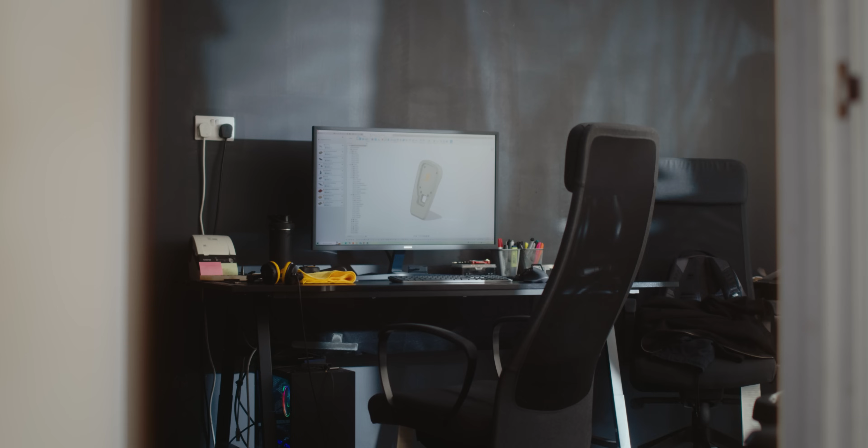Up until now, I've created the mould for most of the components that make up the charging stand, but the main body remains the last major piece to tackle. Originally, it consisted of 4 separate components.

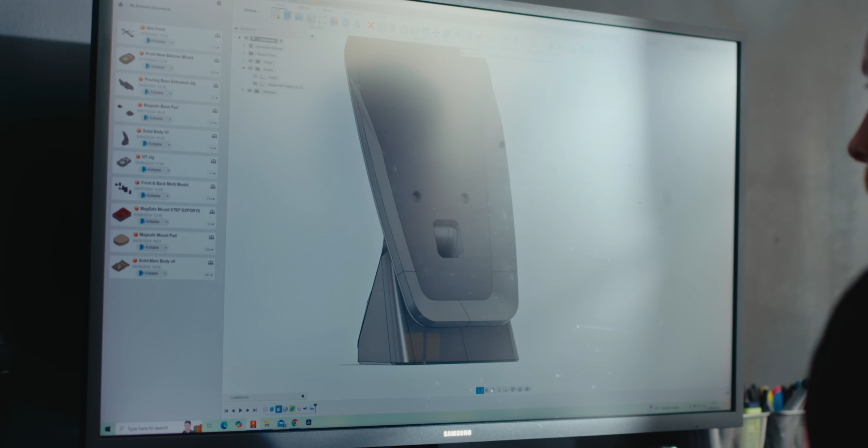While assembling it was enjoyable, it wasn't practical for a low volume, one-person production workflow. In line with the theme of efficiency from the previous video, I've redesigned the main body to be one single piece. By consolidating the parts into one component, I've lost the detachable back panel and insert, which covered the path for the cable. To accommodate this change, I've designed a larger cavity through the body so the entire cable is able to pass through.

I've designed a matrix mould for the main body so I can resin cast it, and a separate tube that will be 3D printed and inserted into the mould before pouring in the resin. This is what will create the pass-through for the cable, and it'll also prevent the component from getting stuck inside the mould. There's many ways you could tackle this, but I'll explain a little bit more about why the tube can't be part of the master and a bit more about the mould design itself.

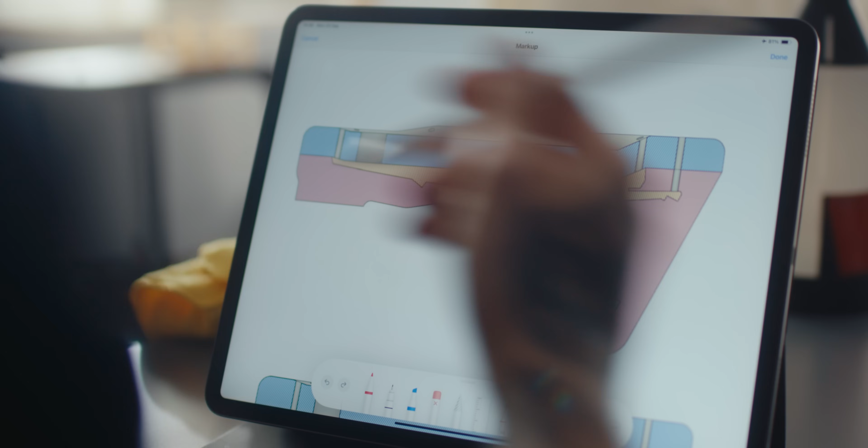So if we take a look at the cross-section of the mould, let's say this is at the point where I've poured the silicone on both halves and the master's got the tube built into it. So we'll have silicone running through the tube, and we'll have to have a split line somewhere. Let's just say it's in the middle. So we can already see why this won't work.

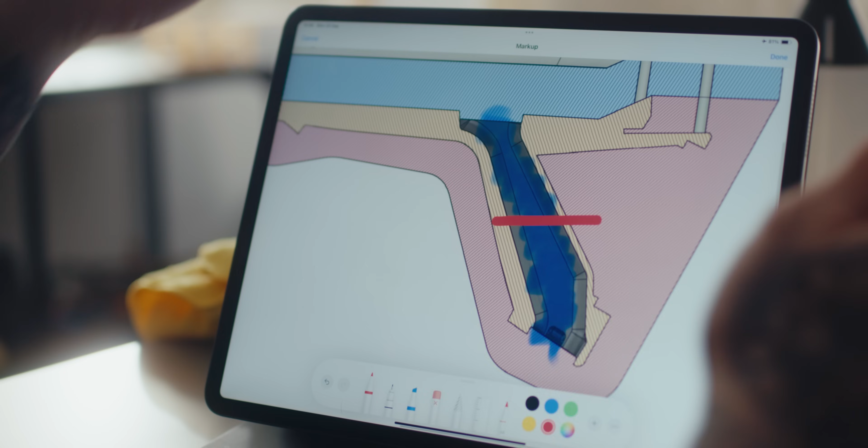We've got a narrow section there and a wide section there. So anything past here won't be able to go out of that smaller opening. And same here, because this is wider, it won't get past that narrow section going that way. So we can't have it in the middle.

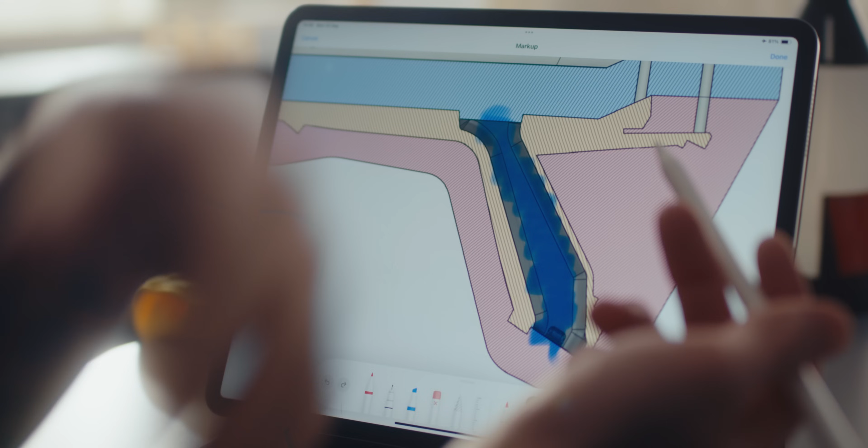The obvious place to go is the narrowest point. So if we go there, that would allow the top section to come out, but we'd have the same issue along the bottom, and vice versa. If we put the split line there with silicone above it, all of this will not pass through that section there. So let's just say this wasn't an issue.

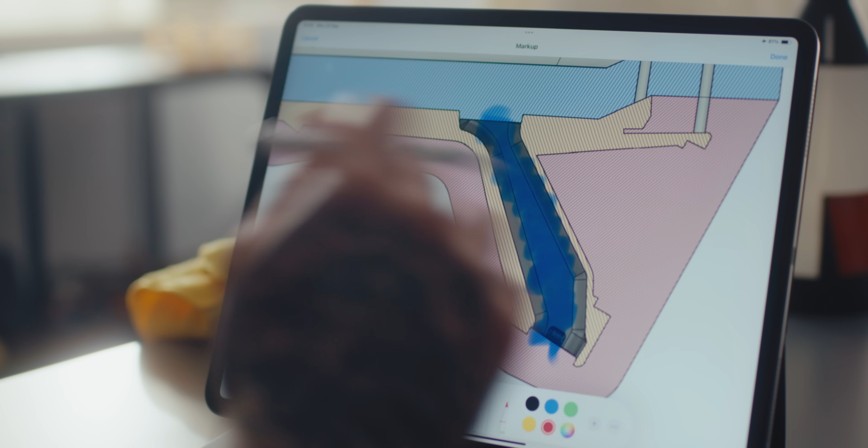Obviously, I can't change the shape of the tube at this point because it was an afterthought, and I'm restricted by the pre-existing geometry of the part. So the shape is the shape. But let's, for argument's sake, say it would work and we had the split line in the middle.

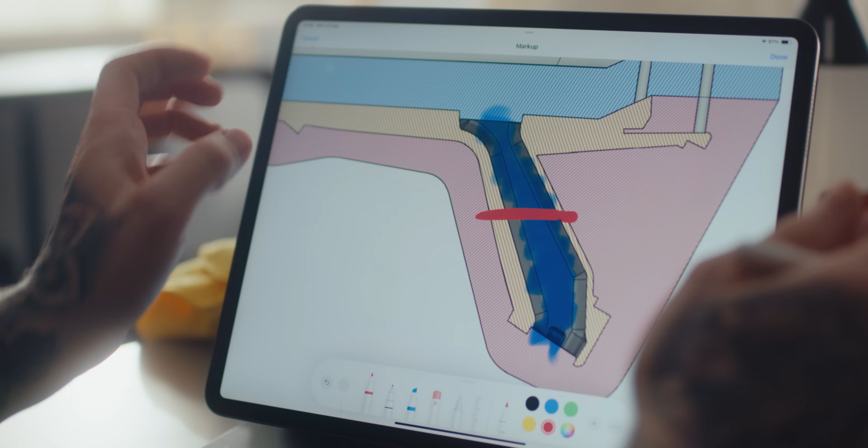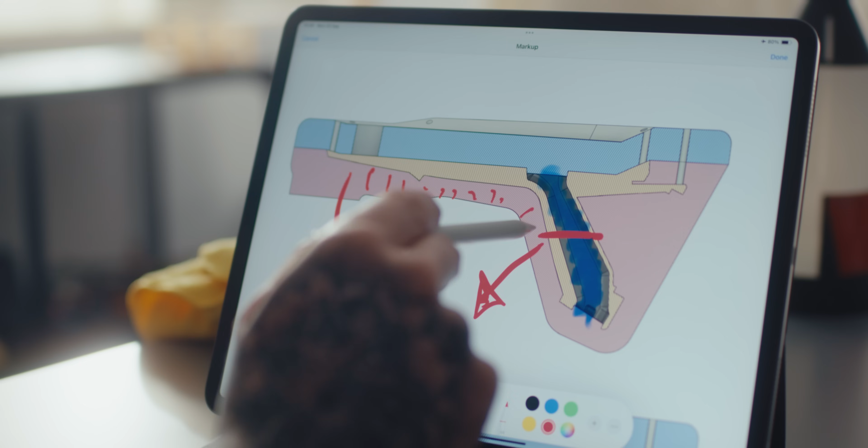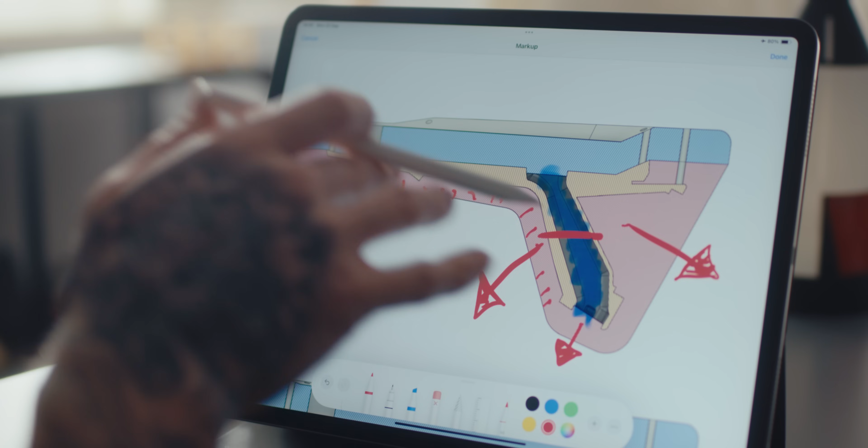When it comes to removing the silicone from the bottom, I'd start with peeling this surface away. Then I peel this one away, and then I pull the silicone out of the tube, which has to go this way. All of this silicone can't go this way until the silicone out of the base is removed, because it's just trapped in there. So to remove the silicone from the base, that needs to go that way. But that now can't go that way until this is removed. So you've got this conflict of direction, which will trap each one in.

And remember, this is a cross section, but this silicone isn't just there, this wraps round the tube. So we are just looking at this in one plane. So we could alleviate this by moving the split line there, which would work. But remember, we can't have silicone in the tube, because this is just hypothetical at this point, since I am restricted by the shape of it.

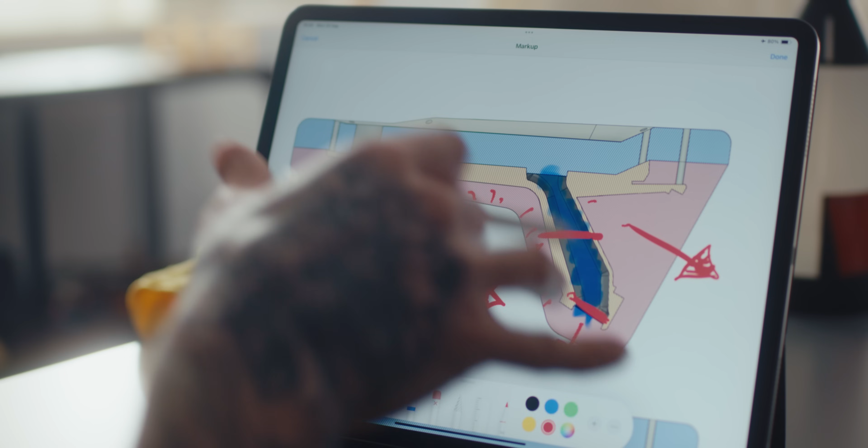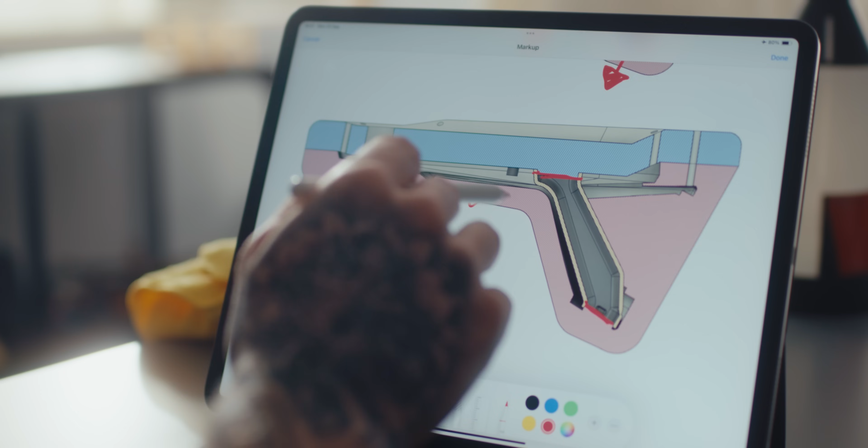So to get to this point where we're able to, this is why I've decided to put the tube in there. By doing that, you can have the split line of each mould just past the entrance of the tube, which will also act as locators for the tube when I put it into the mould. We can do the same as I've just explained, removing this portion first, peeling it off that way. That will be able to go down there. And actually what I'd do is probably release this portion first and then pull the silicone out that way, or the part out that way, depending which way you look at it.

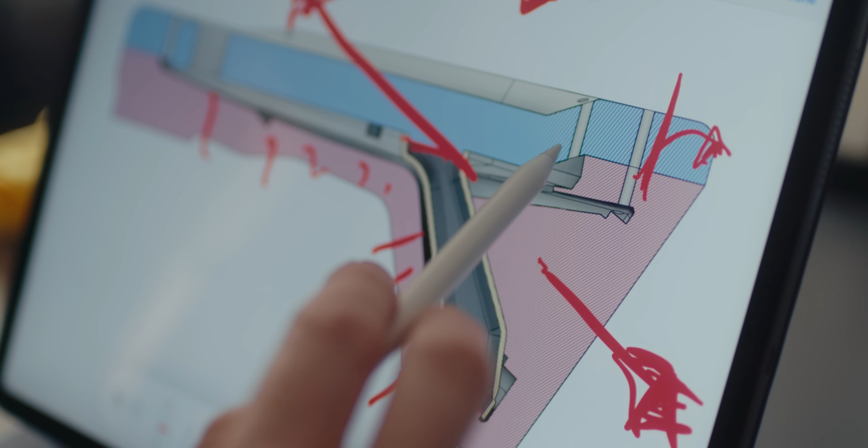You'll also notice that I've got an air hole running through both parts of the silicone. This has happened because I didn't want to put the split line running down across that face, just because I didn't want any flashing directly on the surface of the part. So that's why I've put it across there. Obviously this has created a massive undercut, but because it's a glove mould, I still have the ability to peel this off in that direction without it getting trapped inside.

Like I said, there's many different ways you could tackle this. There's probably things I've overlooked, as well as different methods. You could have had the silicone that's in the base as a third part of the mold. Maybe that would have made things easier, or it could have created more limitations. But either way, this is the most logical way I can see. It includes some overmoulding, which is something I've wanted to do.

So from here, I'm going to print some tubes. I'm going to print some covers to go on the tube. I'll be prototyping them to make sure I've got a perfect fit. And then from there, we can move on to doing the actual mold itself.

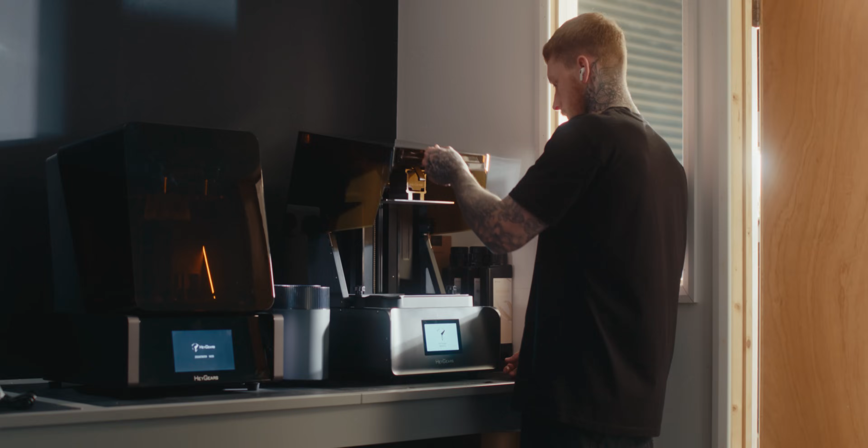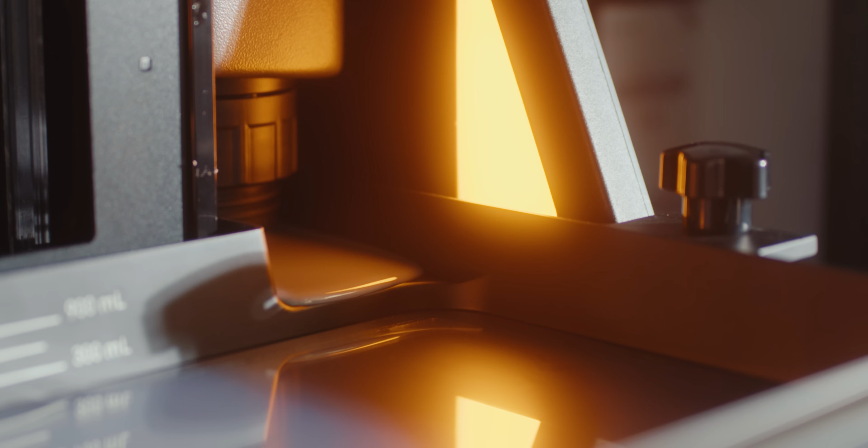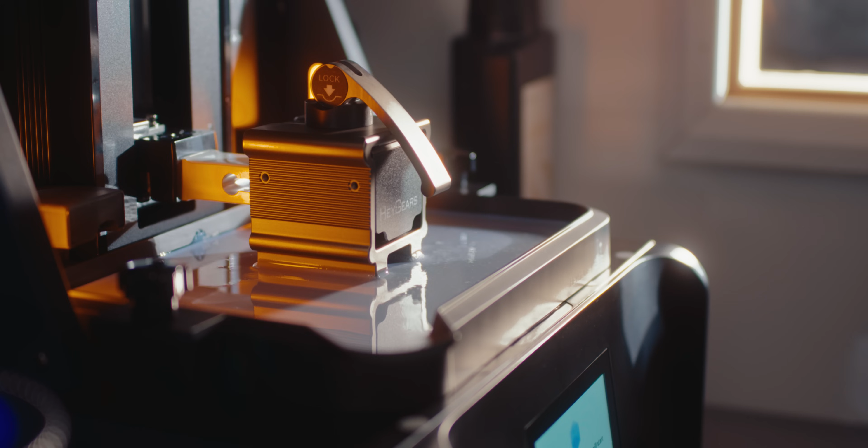I'll be printing these on the new Reflex RS. This maintains the same high quality and reliability of the original model with a few key differences. It's got a larger build volume, enabling me to print the mold shells that would have been too big to print on the previous version. It prints significantly faster as well, without sacrificing quality, allowing for more components per batch and quicker turnaround times. Since workflow efficiency has been a primary focus of this project, these added features will help streamline the process even further.

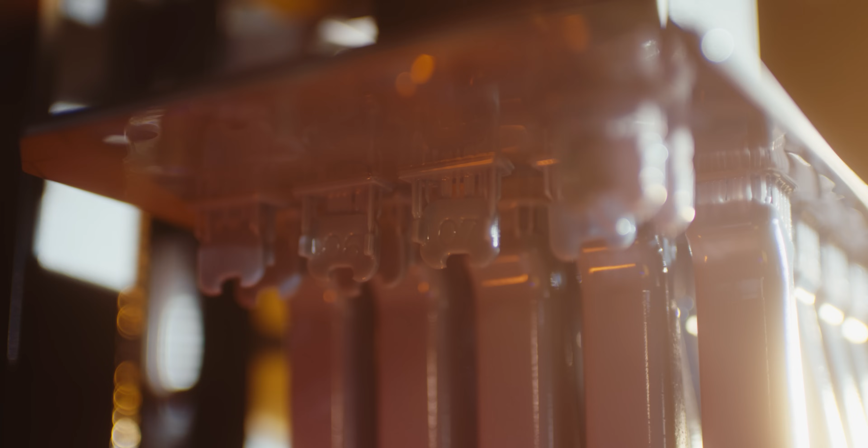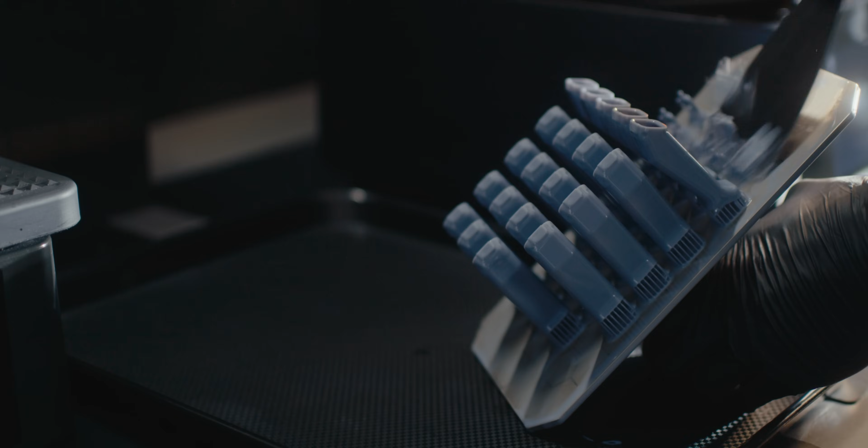I'm using the PARP 10 resin for these prints, as it's a high-speed prototyping resin that's also suitable for end-use components. Before releasing the parts from the build plate, I'm going to drain the excess resin by using the build platform tilting tool. This is a printable component specifically for the RS that can be found in the Blueprint software. From here, I can release the components, remove the support material and wash them off.

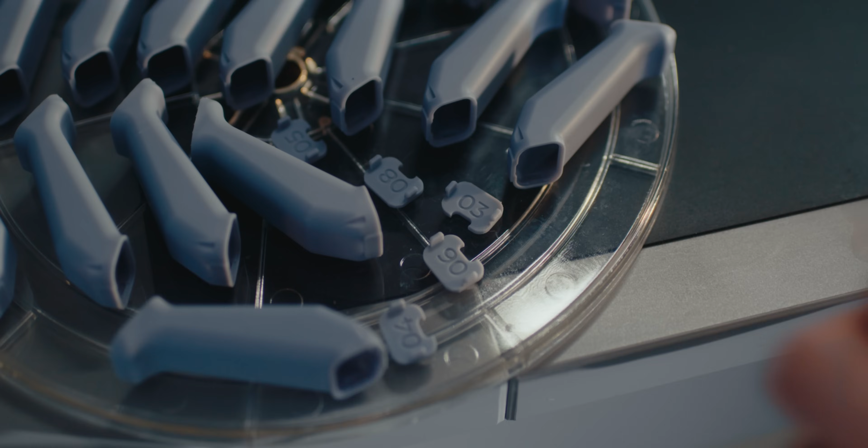Once washed and dried, I can set these off to cure. One feature I really appreciate is that I can send the sliced file to the curing station. This automatically loads the correct profile for the resin used, so there's no guesswork or need to remember settings for each resin. Another thing that I appreciate is that this resin cures in 5 minutes, so it makes for a really quick turnaround on prototypes and final parts.

Before I go ahead and prep these parts, I need to test fit the covers. The covers close up the large opening on the back of the stand, locating into the tube, keeping everything looking clean. Each cover has a slight variation in the clips, and out of all of them, number 7 seems to fit without any movement.

So after using the PARP 10, I think I'm going to use this as my daily go-to resin. It prints quick. I'm impressed with the surface finish, that matte texture to it. So prep work wise, you just sand the supports off, and if you wanted to paint them, it would probably just be a matter of keying them. It cures in 5 minutes, which is just a really quick turnaround. And compared to something like the PAUR10, it's really cost effective.

That's not to say the PAUR10 doesn't have a place, because the only consideration with this resin is that it's quite brittle. With that said, the clips on the cover are really thin, and I have to put a lot of force on them. Well, not a lot of force. They're definitely under tension when I'm putting them in the tube. So the brittleness is going to be application dependent, but I reckon like let's say 90-95% of end use parts, I could use this and then keep the PAUR10 for specific situations. The other thing is,

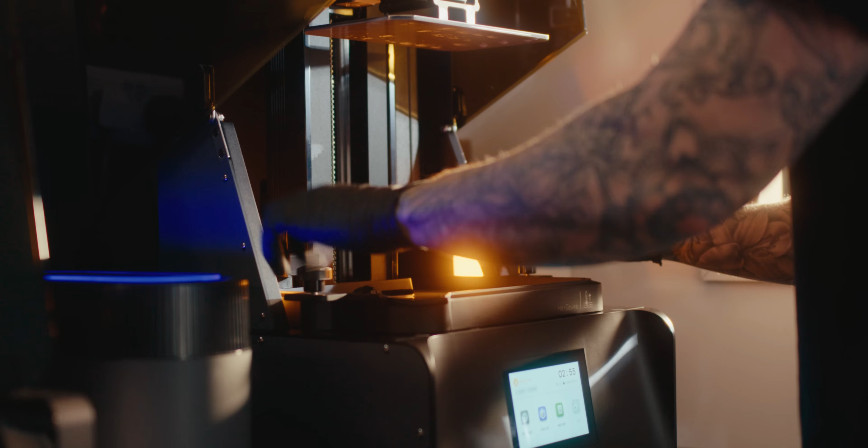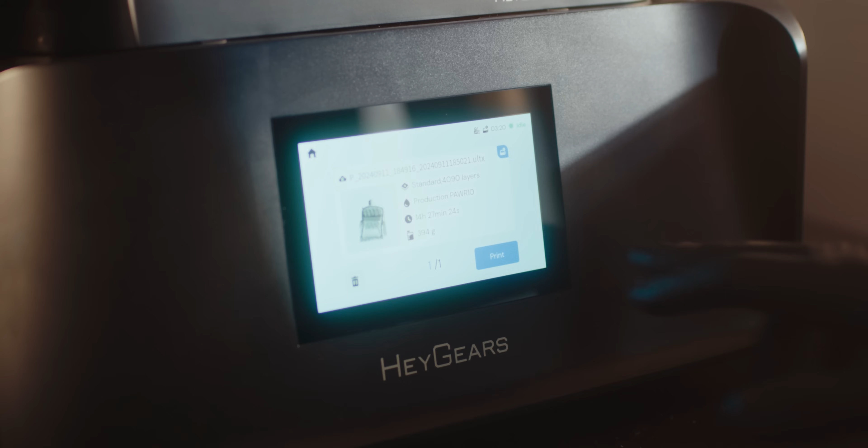Now that I'm satisfied with how the cover fits, I'm switching from the PARP10 to the PAUR10 resin for printing the mold masters and shells. This resin is one of my favourite resins due to its durability, making it perfect for the shells since they need to endure being bolted together repeatedly over a long period of time.

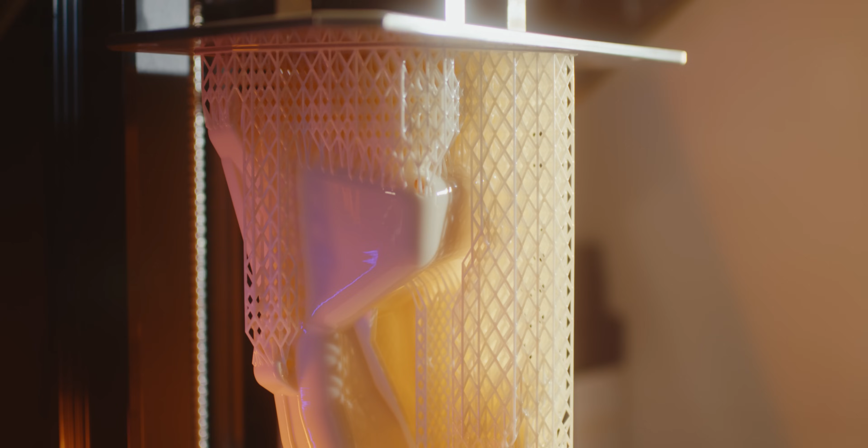Other compatible resins include the PAP10, which offers high strength, temperature resistance and precise detail. The new PAWW10 is a water washable, durable and low odour resin, ideal for users sensitive to resin smells and IPA. PAP10 is available in an orange clay variant as well.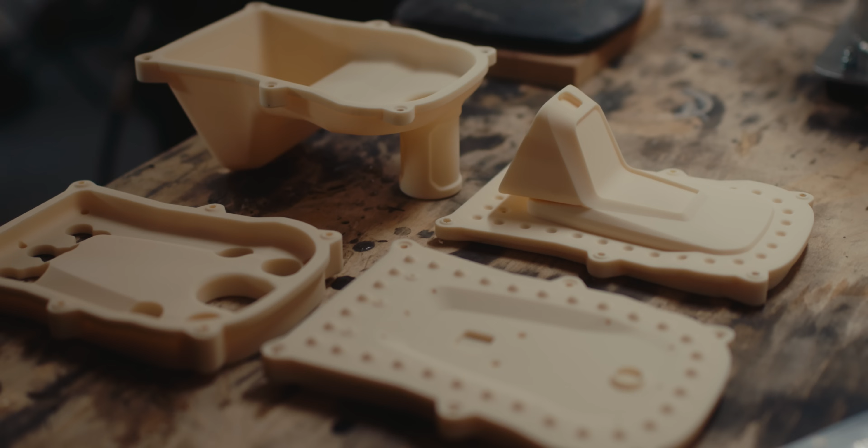Now all the components are finished, I can wash, cure and prep these ready to use. For the prep work, I've sanded off the remaining supports and shot blasted each component with 120 grit aluminium oxide for a consistent finish over all of the surfaces.

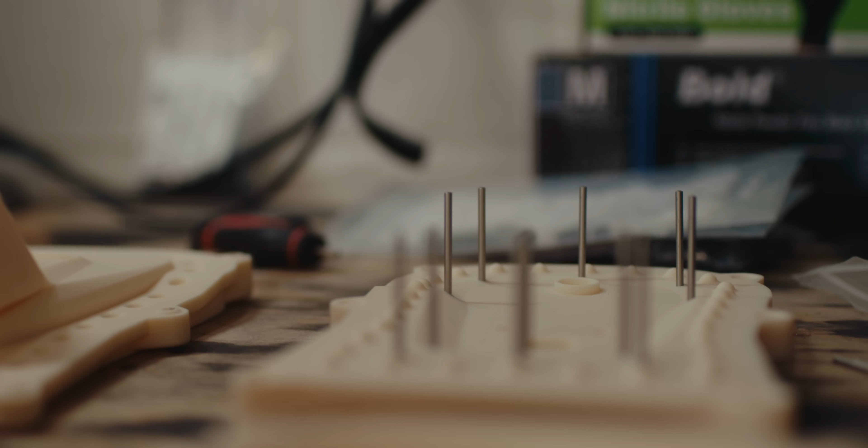The first step in preparing the master and the moulds is to add the dowels to make up the air holes through the silicone. I've incorporated some shallow holes that these 2.5mm dowels push into. I've used this method on the previous moulds and it's become my new favourite way of incorporating sprues into a mould.

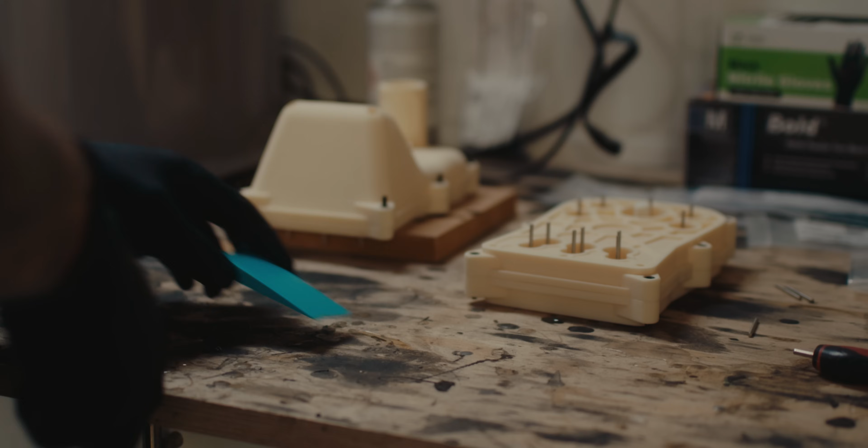From here, I can bolt each shell to each master and position them ready to pour the silicone. The silicone I'm using is my own addition or platinum cure silicone. I've been sampling silicone and resin over the past few months to have a product that covers pretty much all applications that I typically do.

This is Shore 28A and cures in 1 to 2 hours at 25 degrees, making it ideal for quickly producing moulds. This will be available in the coming weeks once the first batch is complete.

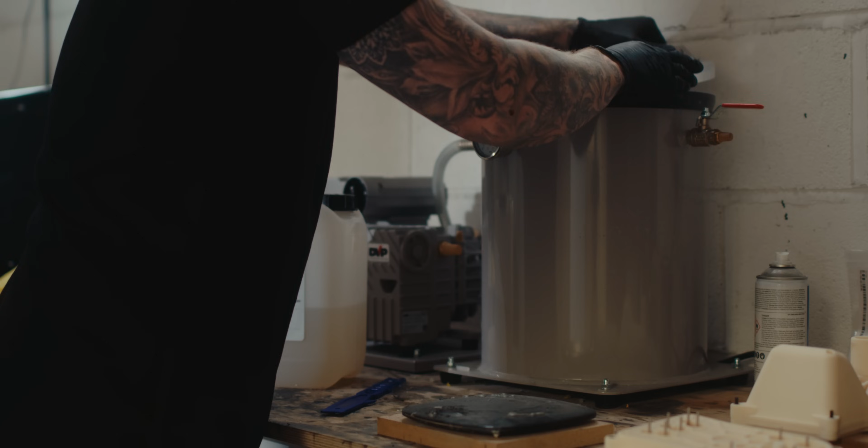Degassing the silicone isn't necessary, but I always recommend it if you've got access to a vacuum chamber. If not, you can use the stretch pour method by pouring from about 1 metre high in a thin stream to a single point in the mould. This helps the air bubbles collapse, reducing the amount of trapped air in the silicone.

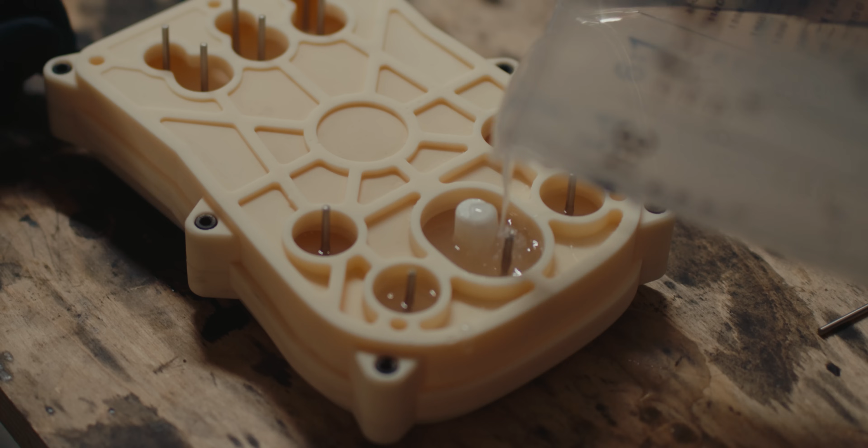I've angled the mould to pour at the lowest point with an air hole at the highest point. This setup prevents air from getting trapped between the silicone and the shell, directing any air towards a single air hole at the top.

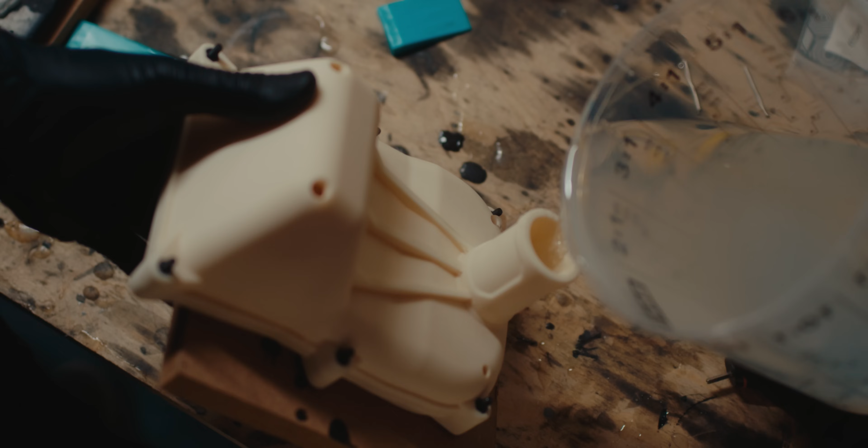I'll also use this same method for the other mould. Since there are air holes considerably lower than the highest point, I can plug those holes with filleting wax once the silicone reaches them, allowing the mould shell to continue filling.

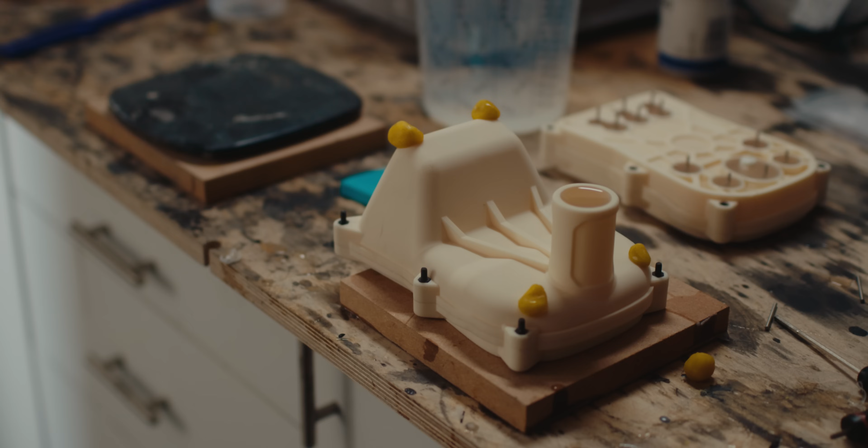So I got a lot of comments on the last video asking why I don't get any cure inhibitions when I use an addition or platinum cure silicone on resin prints. I have had this issue once, but not due to an incompatibility of the two.

I've had it where I've glued together a master with CA glue or super glue and I've accelerated the cure of the mould. I think what's happened there is the heat has caused the glue to gas off solvent and then caused an inhibition, but local to that area. So it's not the same thing, but that's my only experience with it.

So my go-to mould release is the Mann's 200, which I'll typically use at this stage, not for release purposes, mainly just as a safeguard so there is a barrier between whatever the master and shell is and the silicone. Or normally I would actually paint the master. That's mainly to achieve a certain surface finish, but by painting it, there is also a barrier there as well.

Due to the amount of people who asked and my own curiosity, I decided to test it and not put any mould release on these moulds, just to see if I get a cure inhibition.

I'm definitely going to look into this further and run some tests to see which of the variables—the resin, silicone, or my workflow—is preventing me from getting these cure inhibitions. I think if I can figure that out, it'd probably be helpful to a lot of people.

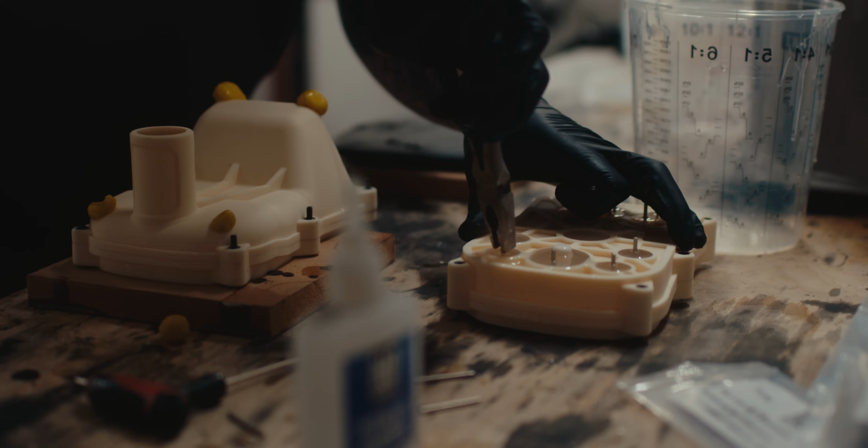Now the silicone's cured, I can remove all the dowels, trim back any excess overflow, and demould all the pieces. In hindsight, skipping the mould release without testing it first was a bit risky.

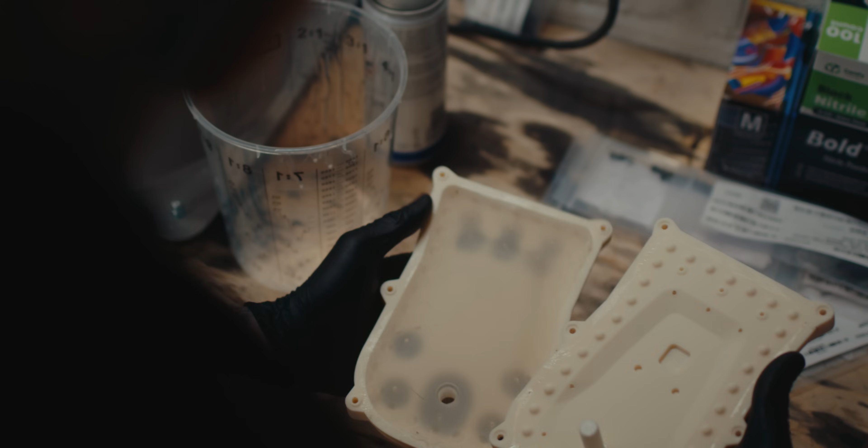Interestingly, there is some cure inhibition around the edges where the shell and the master meet, but even more interestingly, the main surface has no cure inhibition whatsoever. It's a similar situation with the other mould—while the main surface has fully cured, a small section hasn't.

This area was hard to reach due to the depth of the undercut on the master. Judging by the location of the cure inhibitions, my best guess at this point is that the uncured areas are due to insufficient prep compared to the other areas that didn't have any curing problems. This is definitely something I'll keep in mind when doing further testing.

Luckily, I'll still be able to use these moulds after cleaning off the uncured silicone. To prep the moulds, I first need to prep the tube. In case any resin seeps into the tube, I'm applying some wax to the inside of the opening. This thin layer will also help make a seal between the tube and the silicone.

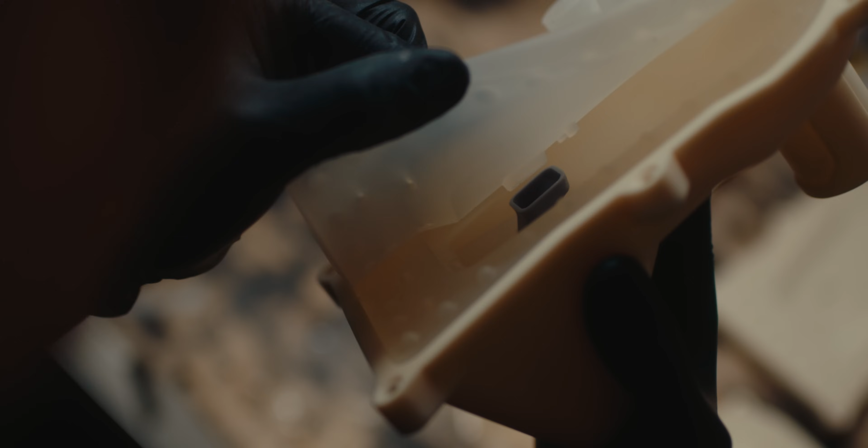I am going to spray a light coat of mould release on the mould for good measure. Then I can push the tube in, locating it onto the boss at the bottom of the mould. I can then align the boss on the opposite side of the mould to the tube and set that into position. All that's left to do is attach the remaining shell, and the mould is ready for use.

The polyurethane resin I'm using, again, is my own. As with the silicone, I want a resin suitable for most applications. It has a pot life of 3 to 4 minutes and can typically be demoulded in 30 to 40 minutes at 25 degrees.

This version is pre-pigmented black, but I will have a natural version available as well. Like the silicone, this doesn't necessarily need to be degassed, but I always encourage it as part of the workflow if you have access to a vacuum chamber.

This will work perfectly for this pour, as I need to pour the first part slowly and at a low angle to minimise trapped air. Then I'll tilt it to pour at the lowest point, allowing air to escape through the single hole at the top, similar to how I poured in the silicone.

A faster curing resin in this situation wouldn't give me enough time to fully fill the mould before it starts to gel.

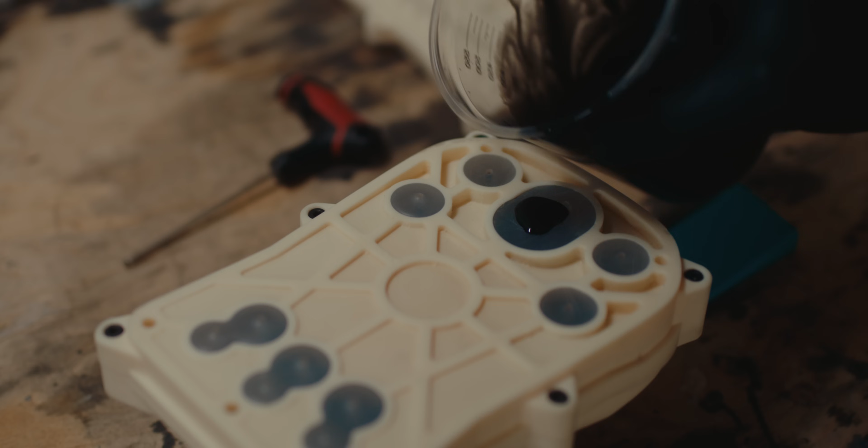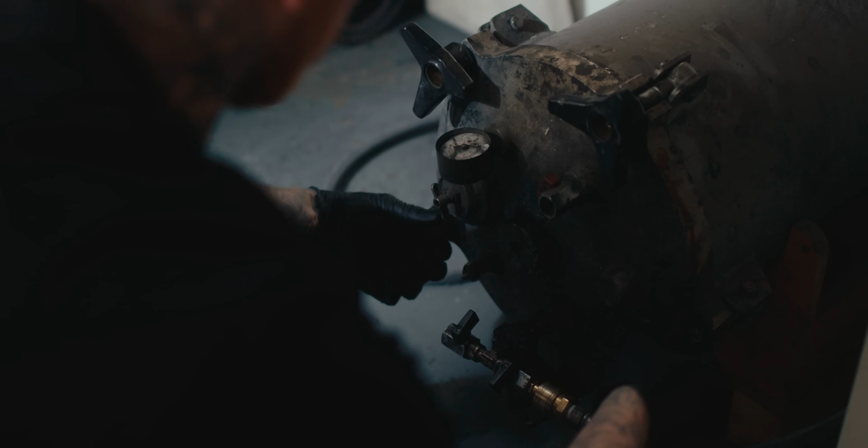Typically, I always use the pressure pot as part of my workflow to compress any small bubbles in the mixture or any air pockets from the resin pour. However, since there's air inside the tube, the external pressure could compress the air and potentially cause the tube to deform or collapse. I'm going to test this regardless, just to see how it reacts and to see if I can use the pressure pot in this workflow or not.

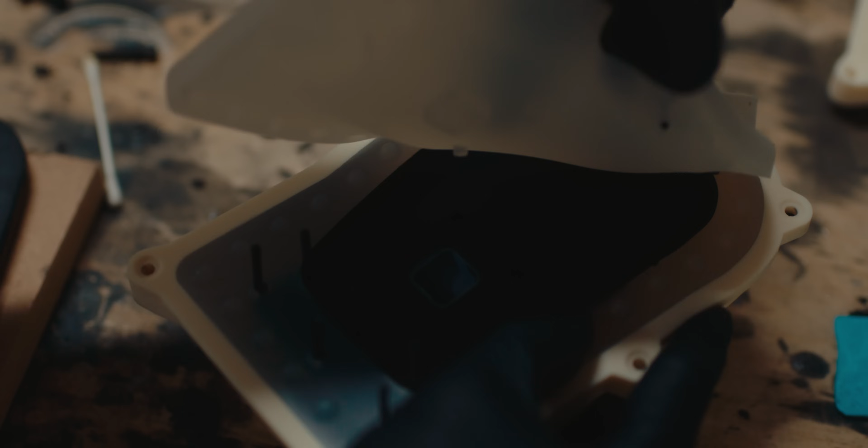Now this is cured, I can demould it and check the results. There is some slight cupping in the tube, so it is unlikely I can use the pressure pot moving forward.

It's important to note this isn't a fault of the Part 10 resin—it's simply a result of using the pressure pot for this particular application.

The back of the tube has also shifted from the boss and has been in contact with the surface of the mould. This end of the tube is meant to be recessed into the part, so it remains hidden once the cover is in place.

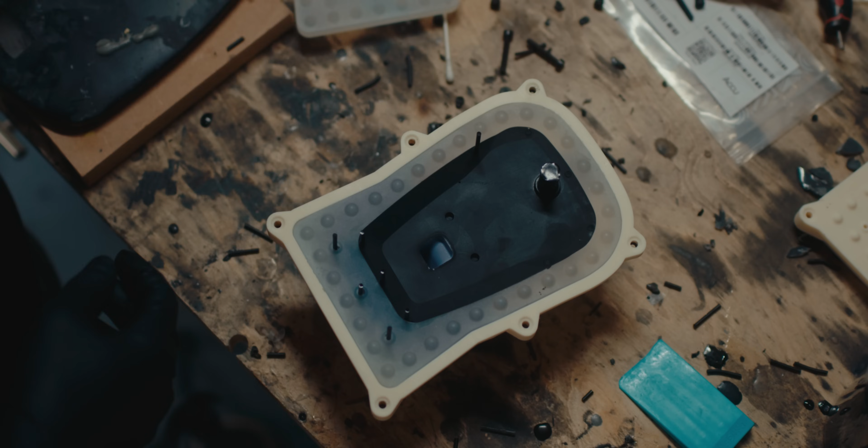Without the pressure pot, getting the pour and angle just right becomes even more crucial to prevent air traps. After a few failed attempts, I've managed to land on the right technique to ensure there are no larger air traps in the mould. The only air hole is a small pinhole directly beneath the tube.

To be honest, I'm surprised it's not larger than that, given how thin that section is. While it's not perfect, I'd say it falls within an acceptable margin of error given the circumstance, and can easily be fixed with a bit of polyester filler.

To finish this off, I can install the threaded inserts, sand off the pour hole and sprues, then finish with paint.

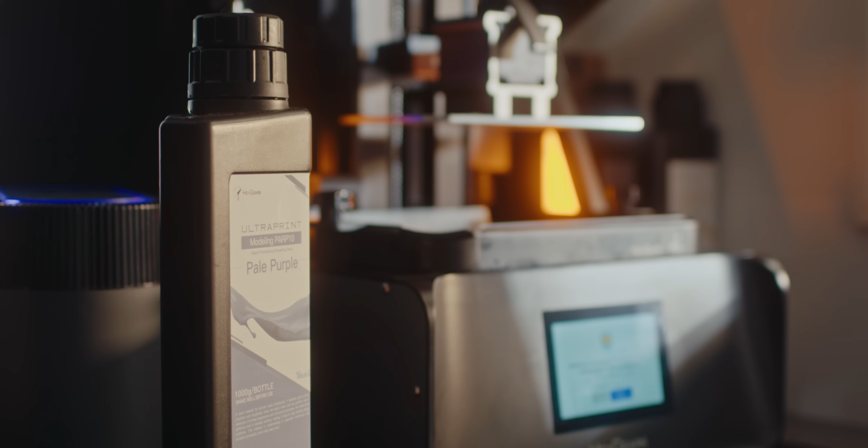Before assembling everything, I figured this would be a good opportunity to test print an alternative version of the front that I'm currently designing. I want to see how quickly and accurately the Part 10 can handle some of the finer details, and use this as a proof of concept before moving forward with this design.

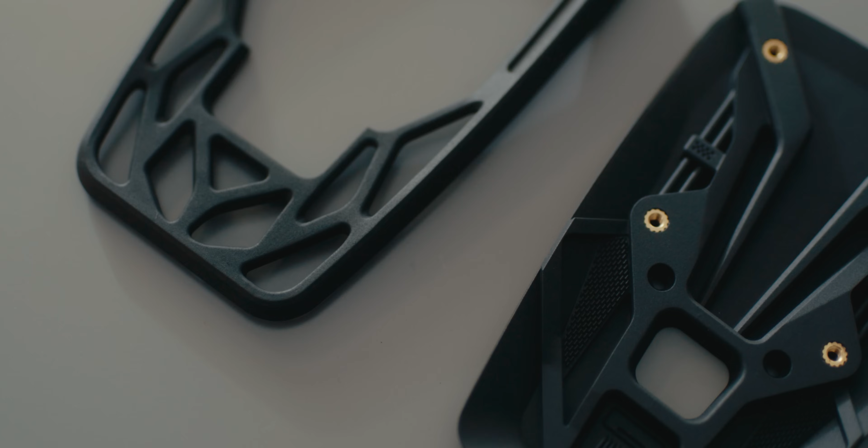Now it's prepped, painted, and the inserts are installed, I can also use this in the final assembly. It's still lacking some detail and some of the profiles definitely want reworking, but I do really like this concept now I can see it as a physical part.

The assembly process hasn't changed much, aside from having fewer steps. I can load the charger into the holder I printed in the previous video.

First, I'm going to assemble one of the cast fronts to check everything aligns correctly, as this is the first time I'm fitting both the cast front and back together.

The charger holder attaches in the same way as before, using 4 M3 machine screws, and the cast pad fits over just like before as well.

Now I can move on to the concept front. I printed this in 2 layers so I'd be able to prep and paint the inside properly. These need gluing together, but in the final version I'll more than likely design it so they just clip together instead.

Again, the charger holder attaches in the exact same way, and now that the cable is routed, the cover can be clipped into the back. Then, finally, the pad can be fitted as well.